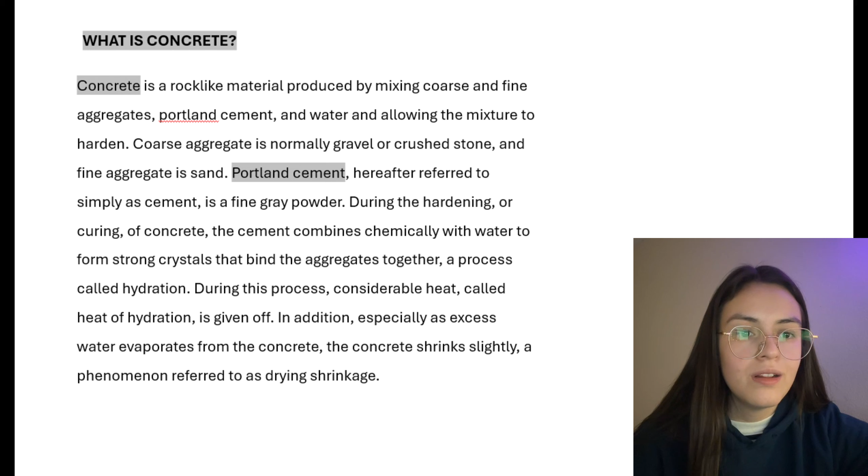During the hardening or curing of concrete, the cement combines chemically with water to form strong crystals that bind the aggregates together, a process called hydration. During this process, considerable heat, called heat of hydration, is given off. Portland cement may be manufactured from any of a number of raw materials provided that they are combined to yield the necessary amount of lime, iron, silica, and alumina.

Sustainable design. Lighter colored concrete paving reflects more solar radiation than darker asphalt paving, resulting in lower surface temperatures and reduced urban heat island effects. Pervious concrete can be used to make porous pavings that allow storm water to filter into the ground, helping to recharge aquifers, reduce stormwater runoff, and reduce waterway pollution.

Photocatalytic agents can be added to concrete used in the construction of roads and buildings. In the presence of sunlight, the concrete chemically breaks down carbon monoxide, nitrogen oxides, benzene, and other air pollutants. Concrete is a durable material that can be used to construct buildings that are lasting and suitable for adaptation and reuse, reducing the environmental impacts of building demolition and new construction.

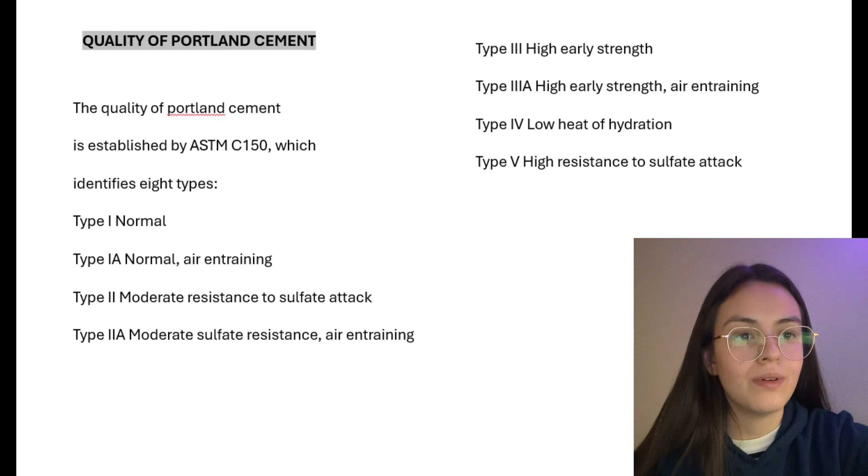When a concrete building is demolished, its reinforcing steel can be recycled. Concrete is 100% recyclable. For example, fragments of demolished concrete can be crushed, sorted, and used as aggregates for new concrete.

Materials and production. Waste materials such as crushed recycled glass and used foundry sand can substitute for a portion of the conventional aggregates in concrete. The production of Portland cement consumes the largest share of energy in the concrete manufacturing process, accounting for about 85% of the total energy required. For every ton of cement clinker produced, almost a ton of carbon dioxide is released into the atmosphere, accounting for roughly 7% of all the carbon dioxide gas generated by human activities worldwide.

Aggregates and water. Because aggregates make up roughly 3/4 of the volume of concrete, the strength of concrete is heavily dependent on their quality. Aggregates for concrete must be strong, clean, resistant to freeze-thaw deterioration, chemically stable, and properly graded for size distribution. An aggregate that is dusty or muddy will contaminate the cement paste with inert particles and weaken it. An aggregate that contains any of a number of chemicals from sea salt to organic compounds can cause problems ranging from corrosion of the reinforcing steel to retardation of the curing process and weakening of the concrete.

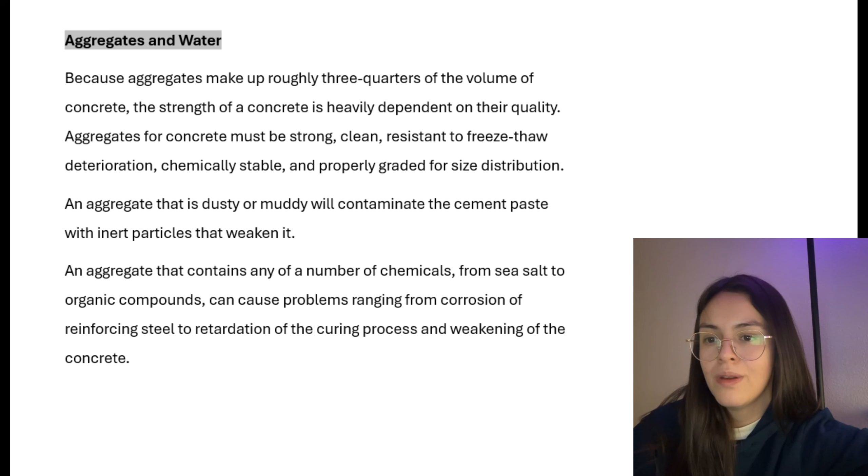Regardless of the criterion to which one is working, however, the rules for making high-quality concrete are much the same: use clean, sound ingredients, mix them in the correct proportions, handle the wet concrete properly, and cure the concrete thoroughly under controlled conditions.

Proportioning concrete mixes. The starting point of any mix design is to establish the desired workability characteristics of the wet concrete, the physical property of the cured concrete, and the acceptable cost of the concrete, keeping in mind that there is no need to spend money to make concrete better than it has to be for a given application.

Concrete strength is varied to suit the needs of the application. Concretes with ultimate compressive strength as low as 2000 psi are satisfactory for some foundation elements, while those in the range of 3000 to 5000 psi find extensive use throughout building structures.

Concretes with compressive strengths of 8000 psi or greater are called high-performance concretes. They are used where greater strength and durability are required, but at greater cost and with more stringent requirements for production controls and testing.

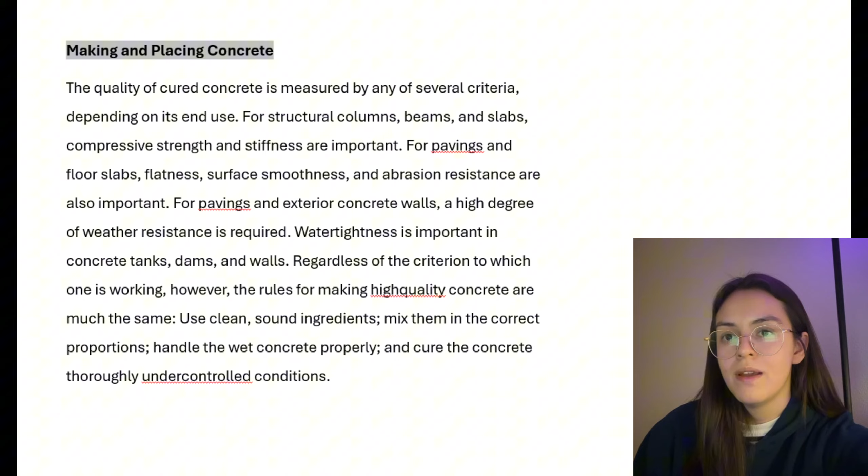A fortunate combination. For ages, concrete has been a common material in buildings, but its lack of tensile strength has restricted its use in structural applications. Concrete was revolutionized by steel reinforcing, which made a material that could bear bending, shearing, and tension. As it happens, concrete and steel go hand in hand because of their comparable rates of thermal expansion. The materials won't split or break when the temperature changes. Steel is additionally shielded from corrosion by the alkaline chemistry of concrete, and the bond between the two materials inherently guarantees that forces are conveyed efficiently.

The science of reinforcement. The basic idea behind reinforced concrete is that steel bears the tension while concrete bears the compression. Where tensile forces are present, engineers carefully position steel reinforcement. Although most reinforcing bars, or rebar, are used to manage tension, some steel is also utilized in compression zones, especially in architecturally constrained columns and beams. Beyond strength, reinforcing steel makes construction more resilient over time by controlling shrinkage, thermal expansion, and cracking.

The role of rebar. Let's discuss rebar. These hot-rolled steel bars are available in a range of standard diameters, denoted by numbers that, in the United States, equate to 1/8 of an inch. For example, a number 6 bar has a diameter of 3/4 of an inch. In order to balance material efficiency and convenience of construction, engineers choose rebar based on load requirements and spacing limits.

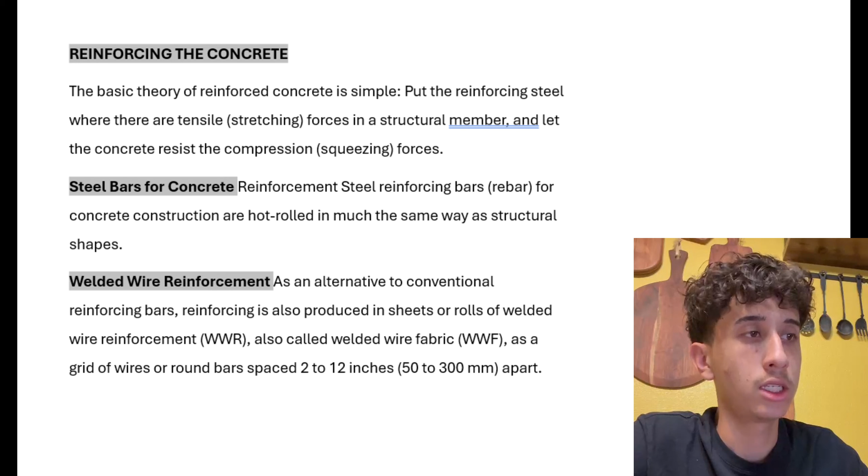Grade 60 is the most often employed. Beyond traditional rebar, steel bars aren't the only kind of reinforcement. Corrosion-resistant substitutes like epoxy-coated and galvanized bars are utilized in salt-exposed areas like parking garages and maritime buildings. Another alternative that is becoming more popular is non-metallic fiber-reinforced polymer bars, which lessen corrosion and weight issues.

Another approach is welded wire reinforcement, a grid of steel wires prefabricated into sheets. WWR is perfect for slabs and walls since it makes placement easier and lowers labor expenses.

Reinforcement in slabs and columns. Reinforcing bars in one direction go through one-way slabs, which operate similarly to broad beams. Two-way slabs more effectively disperse load within a reinforcing grid. Temperature and shrinkage bars stop slabs from breaking because of material movement.

In order to distribute compressive loads and prevent buckling, columns need a mix of lateral ties and vertical reinforcing bars. Engineers employ continuous spirals, which offer superior resistance to seismic stresses, or discrete ties, depending on the design.

Innovations and challenges. Tiny strands called fibrous reinforcement are added to concrete to help control shrinkage and increase impact resistance. These fibers give slabs and precast parts flexibility and durability, but they cannot replace conventional rebar.

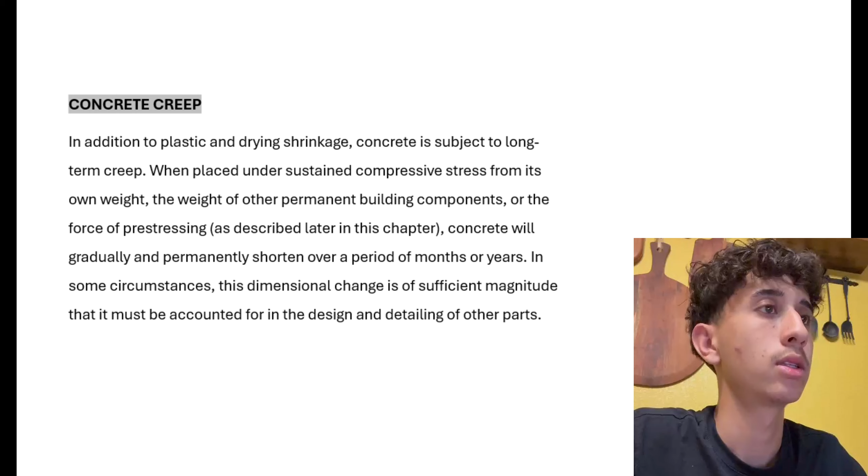Constructing with reinforcement. Rebar is manufactured, cut, bent, and tied into position in accordance with engineering plans before concrete is poured. After that, the bars are fastened with wire ties or occasionally welded joints. Load transmission happens through the surrounding concrete where reinforcing bars overlap. However, welding or mechanical splices may be required in some situations.

The arrangement of rebar in beams is predictable. Stirrups, which are U-shaped steel ties, resist diagonal tension close to the supports, while bottom bars manage tensile forces at midspan. To control stress reversals in continuous beams, extra top bars are positioned above walls and columns.

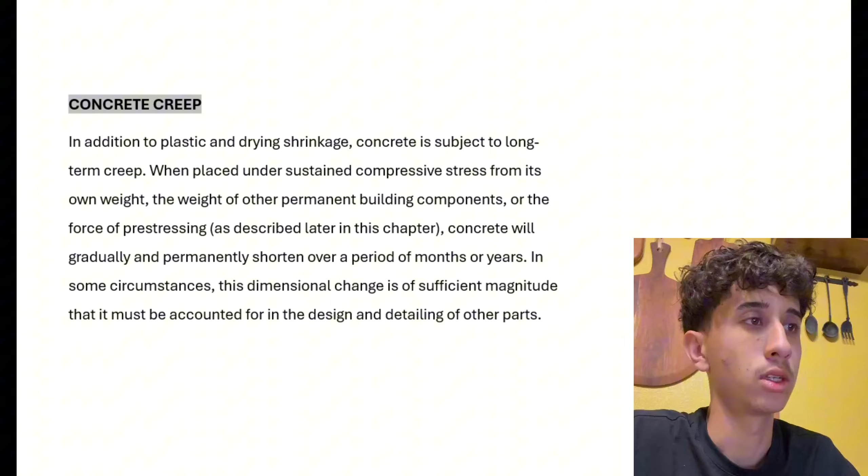The next part will be prestressed concrete. Concrete can withstand a great amount of compressive stress, but it has a very low tensile strength. Because of low tensile strength, concrete cracks when subjected to maximum load. As the name indicates, prestressed concrete is a form of concrete in which internal stresses are introduced before its application so that it can counteract the tensile stresses produced in concrete due to the external load.

When we design a concrete structure, we design it for ultimate strength. It means, in the worst case scenario, the structure should not collapse. Another important design criterion is there should not be any deflection when a load is applied to the structure. When a beam supports a load, the compression side of the beam is squeezed slightly and the tension side is stretched.

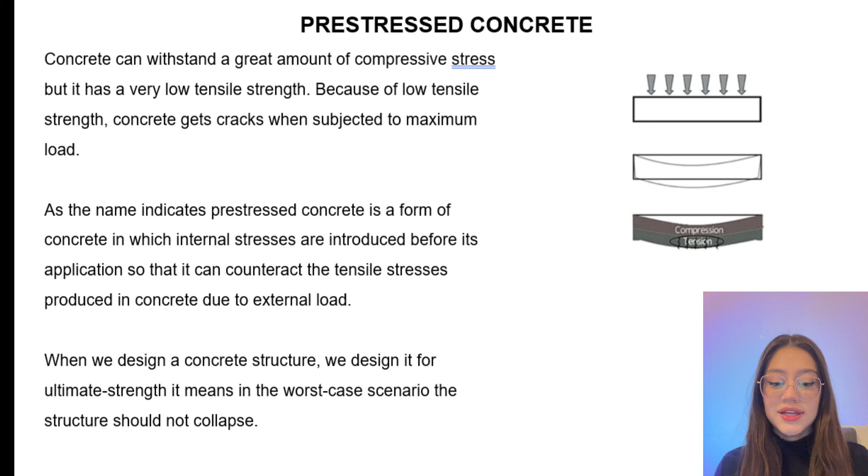In a reinforced concrete beam, the stretching tendency is resisted by the reinforcing steel, but not by the concrete. When the steel elongates under tension, the concrete around it forms cracks that run from the edge of the beam to the horizontal plane in the beam, above which compressive forces occur. This cracking is even visible to the unaided eye in reinforced concrete beams that are loaded to their full capacity. In effect, more than half of the concrete in the beam is doing no useful work except to hold the steel in position and protect it from fire and corrosion.

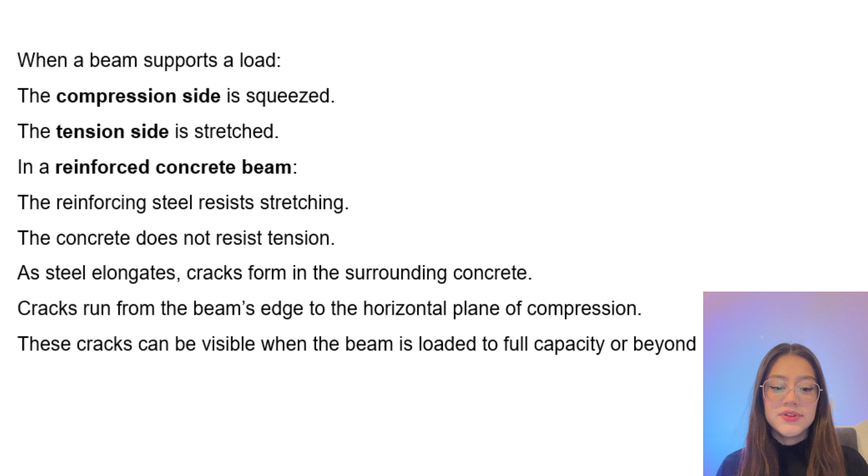If the reinforcing bars could be stretched to a high tension before the beam is loaded and then released against the concrete that surrounds them, they would place the concrete in compression. If a load were subsequently put on the beam, the tension in the steel would increase further, and the compression in the concrete surrounding the steel would diminish. If the initial tension or prestress in the bars were of sufficient magnitude, however, the surrounding concrete would never be subjected to tension, and no cracking would occur.

Furthermore, the beam will be capable of carrying a greater load with the same amount of concrete and steel than if it were merely reinforced in the conventional manner. This is the rationale for prestressed concrete.

Prestressed members, particularly those designed to work in bending, contain less concrete than reinforced members of equivalent strength. Their lighter weight also pays off by making prestressed concrete members easier and cheaper to transport. For this reason, structural precast concrete is used for slabs, beams, and girders, and in some cases, columns as well.

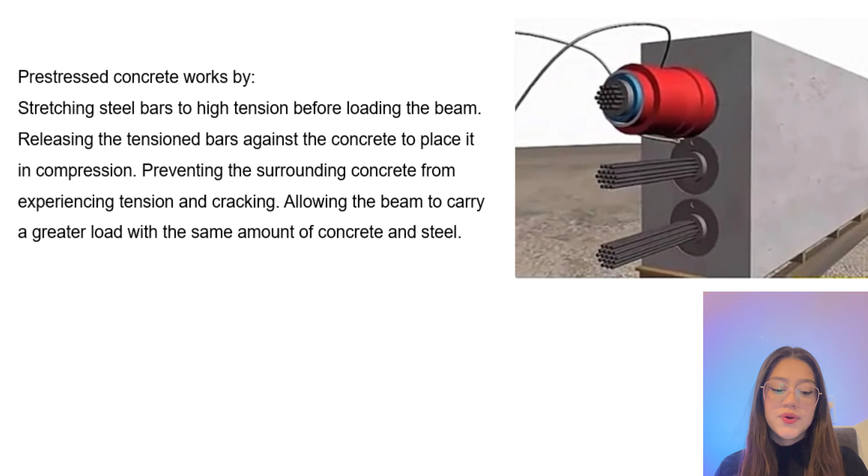In practice, ordinary reinforcing bars are not sufficiently strong to serve as prestressing steel. Prestressing is practical only with very high strength steel strands that are manufactured for the purpose. These are made of cold-drawn steel wires that are formed into small diameter cables. With prestressed concrete, we have two methods. The first one is pre-tensioning, and the second one is post-tensioning.

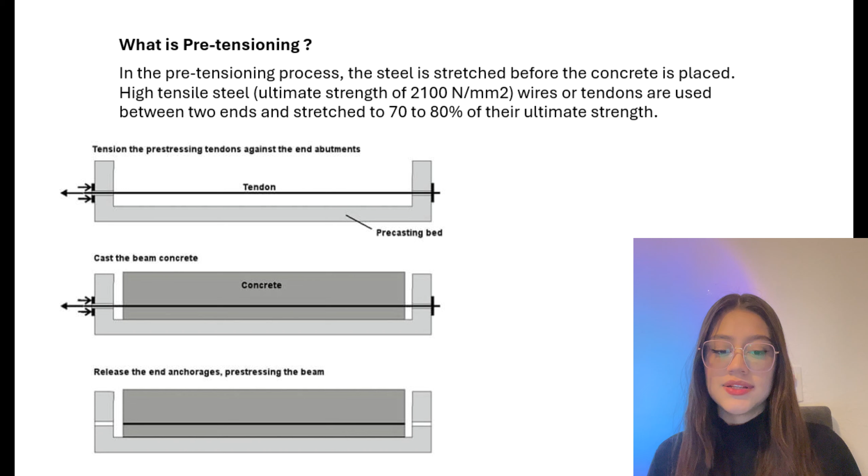What is pretensioning? In the pretensioning process, the steel is stretched before the concrete is placed. High tensile steel wires or tendons are held between two ends and stretched to 70 to 80% of their ultimate strength. After that, the concrete is poured around the tendons and allowed to cure. Once the concrete gains the desired strength, the stretching forces are released. When the highly stressed steel attempts to contract, the concrete gets compressed. Then the concrete will be in a permanent prestressed state.

Generally, pretensioned concrete elements are precast in a factory and must be transported to the construction site. In place of tendons, wire strands, or cables, high-tensile steel bars can also be used for pretensioning. Some examples of pretensioned precast concrete products are foundation piles, railway sleepers, electrical or lighting poles, floor slabs, beams, pipes, and partition walls.

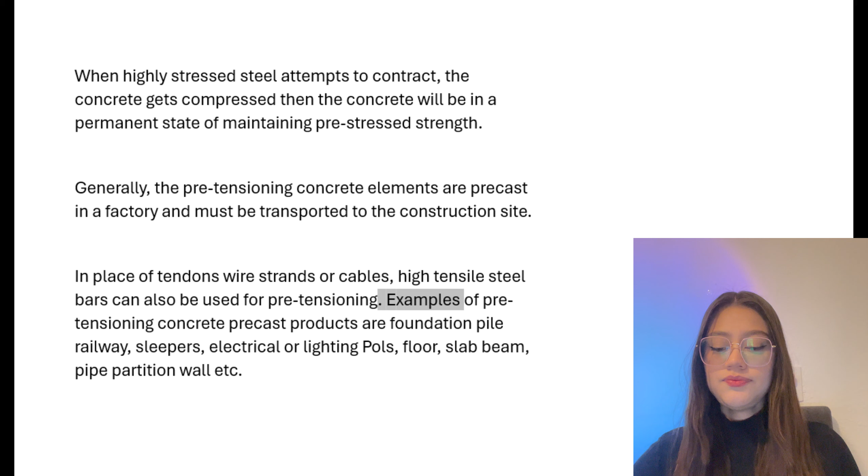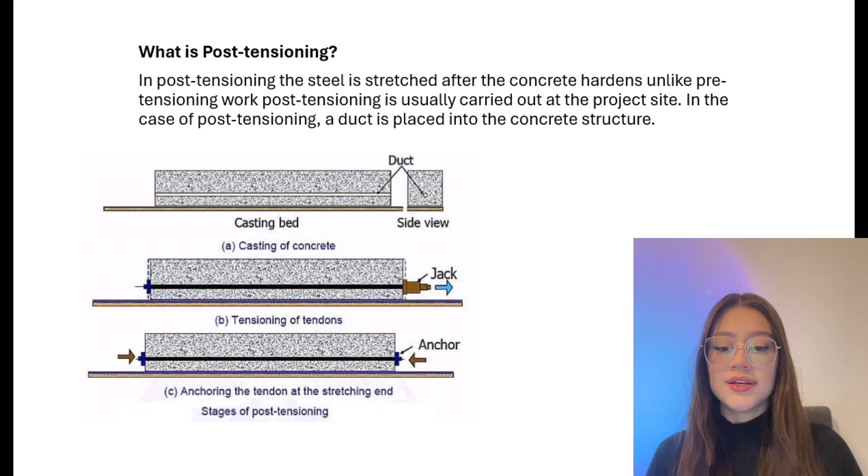Now, what is post-tensioning? In post-tensioning, the steel is stretched after the concrete hardens. Unlike pretensioning works, post-tensioning is usually carried out at the project site. In the case of post-tensioning, a duct is placed into the concrete structure. Concrete is cast and allowed to cure. When the concrete reaches its required strength, the tendons are stretched and locked with anchors.

The excess ends of the tendons are then cut away, and the duct is grouted and covered with concrete for rust prevention. Examples are roads, railways, tunnels, dams, foundations, buildings, industrial facilities, reservoirs, underground construction, and airports and seaports.

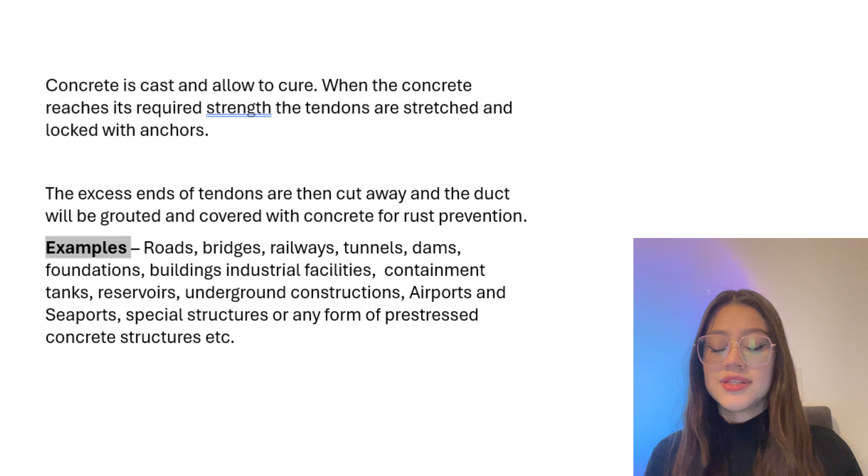What are the advantages and disadvantages of prestressed concrete? Well, the advantages are that the consumption of materials like concrete and steel will be reduced. Longer beam spans and girders can be constructed, which gives uninterrupted floor space and parking facilities. It also has long-term durability, and the possibility of steel corrosion and concrete deterioration is reduced because the concrete is crack-free. It also has excellent fire resistance and low maintenance costs in comparison to reinforced concrete. Prestressed concrete offers great load resistance and shock resistance as well.

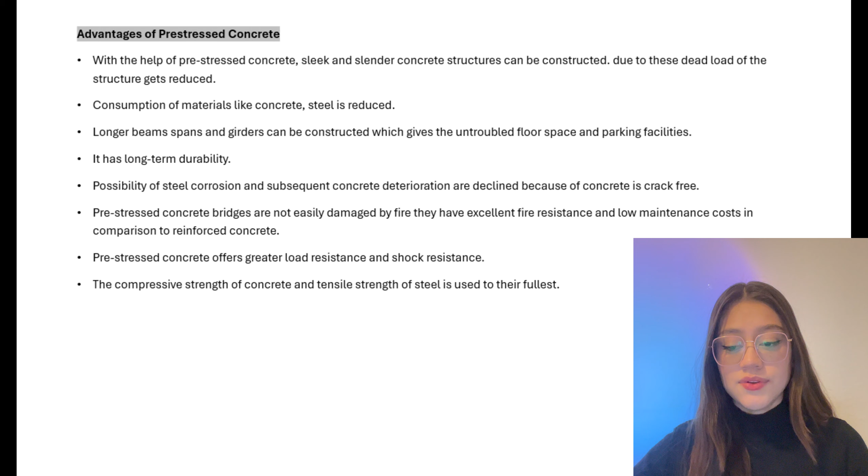And now the disadvantages. Prestressed concrete requires high quality dense concrete of high strength. High strength concrete in production, placement and compaction is required. It also requires high tensile steel, which is 2.5 to 3.5 times costlier than mild steel. The prestressing process requires complicated tensioning equipment and anchoring devices, which are very costly. Prestressed concrete construction also requires very good quality control and supervision. It also needs skilled laborers, and prestressing is uneconomical for short spans and light loads.

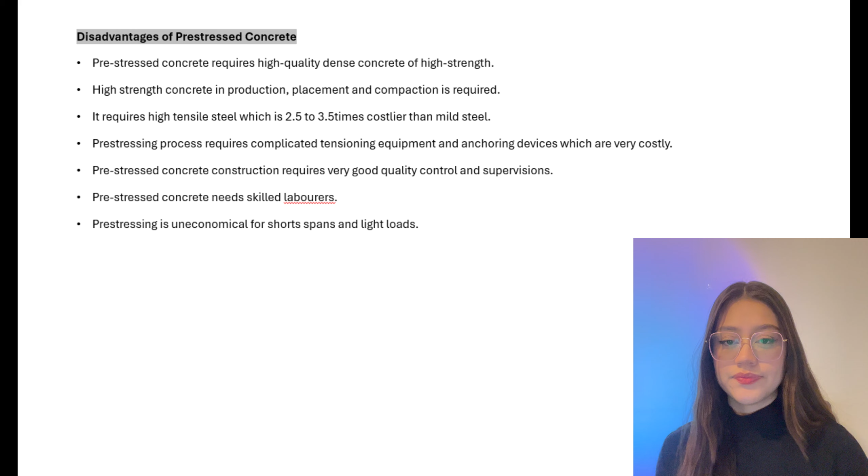Going to the concrete standards, in the United States, there are two standards that establish basic quality requirements for concrete building structures. The first one is ACI 318, which is the Building Code Requirements for Structural Concrete. This one sets the minimum regulatory requirements. And the second one is ACI 301. This one is Specifications for Structural Concrete for Buildings, and it translates these requirements into construction document specifications.

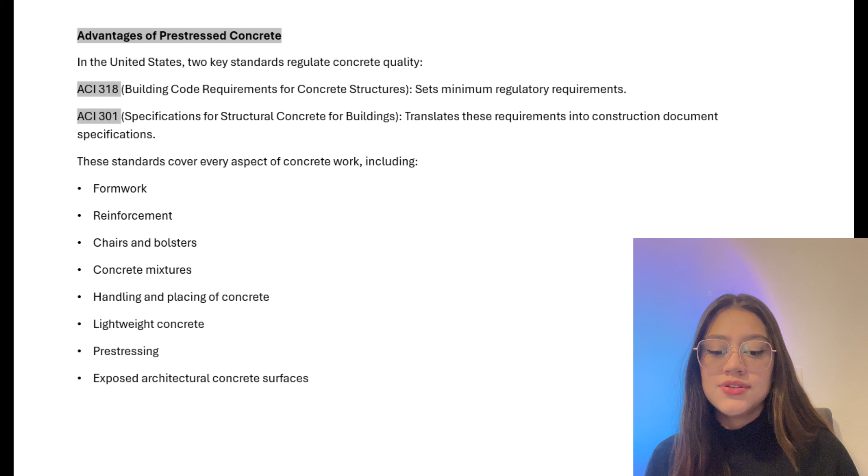These standards cover every aspect of concrete work, including formwork, reinforcement, chairs and bolsters, concrete mixtures, handling and placing of concrete, lightweight concrete, prestressing, and exposed architectural concrete surfaces. These standards serve as the common basis for professionals involved in designing and constructing concrete buildings of all types.

Talking about innovations in concrete, concrete is highly subject to innovation in its formulation and capabilities. There are some advancements in concrete strength and ductility. The first one is engineered cementitious composites. This one is made with polymer fiber reinforcement, cementitious materials, and fine aggregates. It provides higher tensile strength and ductility, making it behave similarly to ductile metals. It also offers improved durability under flexural and seismic loads.

The second one is ultra high performance concrete. This one can achieve compressive strengths up to 30,000 psi. It is composed of Portland cement, silica fume, quartz flour, fine sand, water reducer, water, and steel fiber reinforcement. This one is stronger, less permeable, and more durable than conventional high-strength concrete. Additional steel microfiber reinforcement enhances tensile strength and ductility. The micro-reinforcement creates extremely tough and high tensile strength concrete.